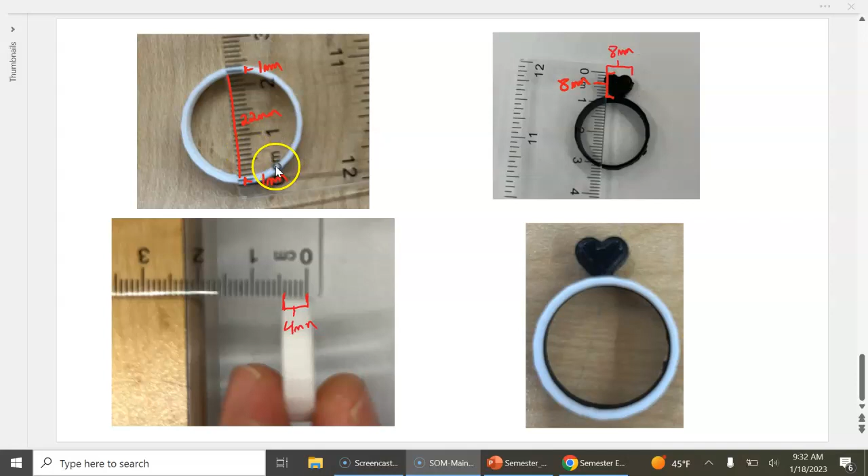So you can see the dimensions here. We have 1 millimeter for the thickness of the ring. The height of the ring is 4 millimeters, and the inside diameter is 22. Once we get to the heart, it's going to be 8 by 8. So let's go ahead and get started.

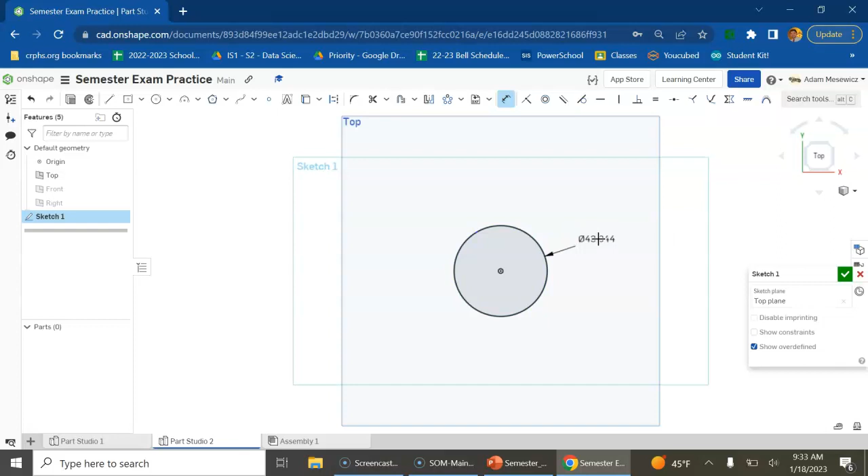This is going to be a single extrude, so we're going to be working on the top plane. We can hide the front and hide the right. We'll create a new sketch on the top plane, and start by making the inside diameter, which was 22 millimeters, so we can dimension that to 22. Then the thickness of the ring itself was 1 millimeter.

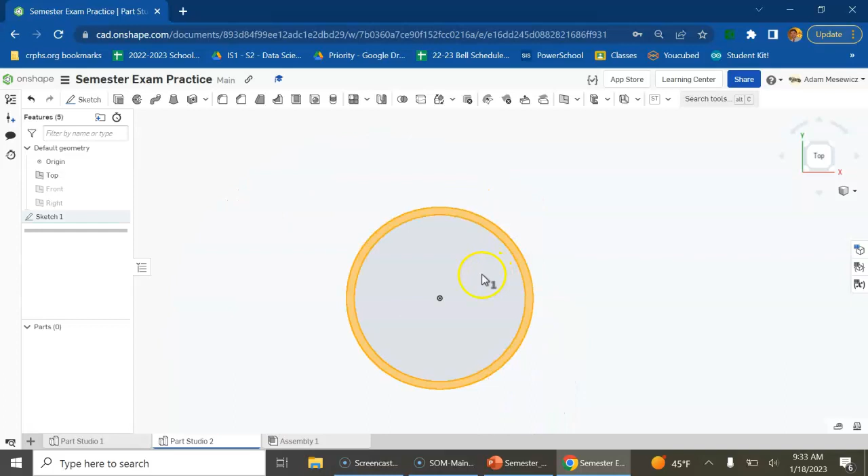So we can change this by doing an offset, change that to 1, and just like that, we have the sketch for our ring. To bring this ring to life, we will extrude it at the height, which was 4 millimeters. And like that, we have the ring.

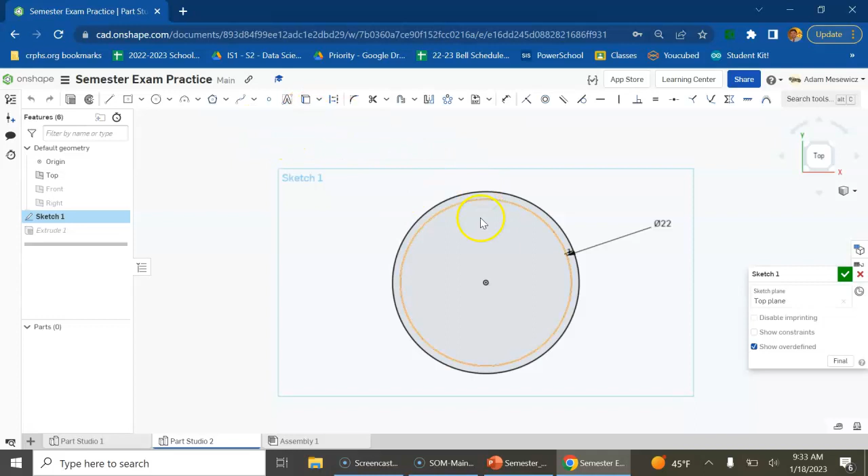Pretty easy. Okay, so let's go ahead and add the heart onto the ring. We'll go back to the original sketch here, and what we need to do is create a symmetric heart, and the heart needs to be 8 by 8.

So what I'm doing right now is adding in a construction line, because I'm going to make this heart symmetric, so I'm going to mirror it over this line. Alright, let's go ahead and create a point.

Now I do want this to be slightly intersecting with my ring itself, so that when I extrude it, it's all one part together. Not too much, but just a little bit. So we'll go ahead and make sure that happens.

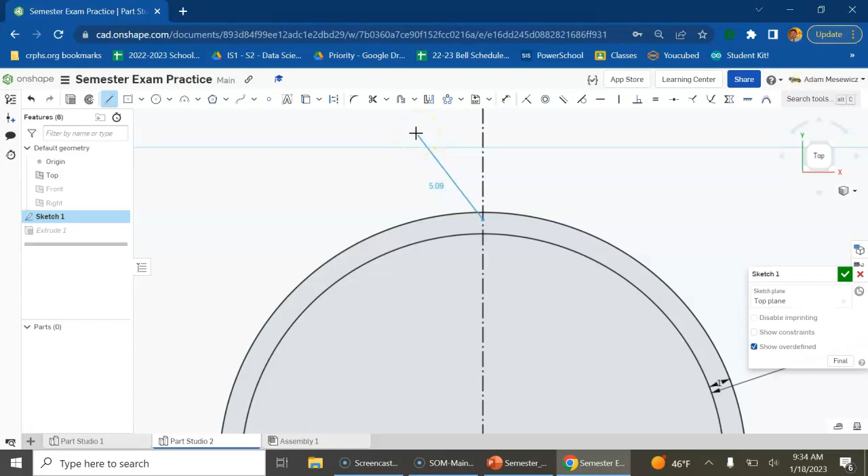Make sure that's just a regular line, not a construction line. And it needs to be 8 millimeters total, so this should be about three-quarters. Maybe we'll make this about 5 millimeters here.

And then to add on the top part, we won't use a circle, but a 3-point arc, starting here, ending about here, and make the radius right about there. Okay, so we have half of the heart.

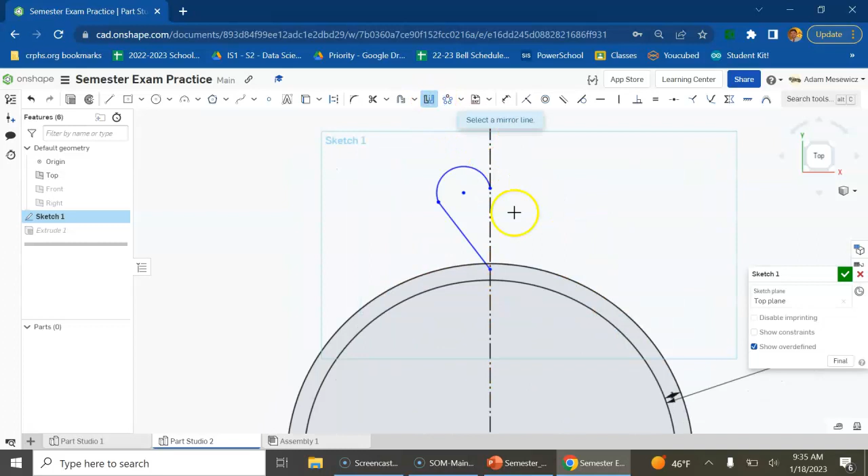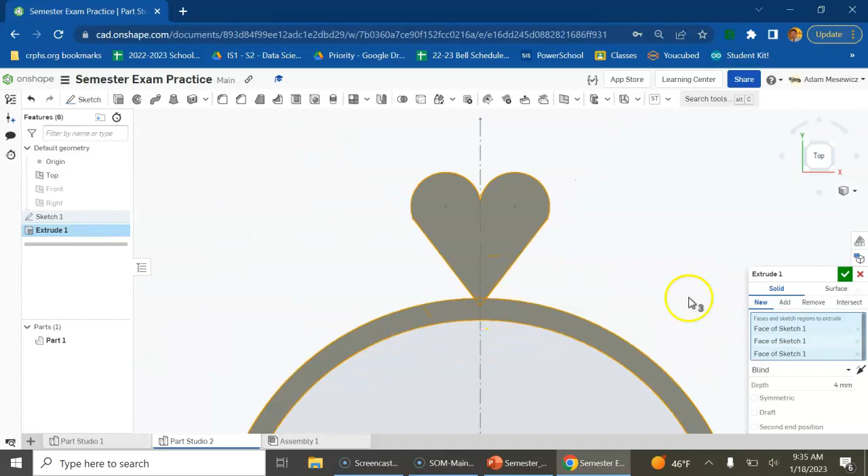Now all we need to do is use the mirror tool. So we select our mirror line, choose our entities to mirror, and after we change it—if you notice, right now all it did was cut out that little part. We need to change the extrude and add this and the part that's intersecting. And there we go.

Alright, so there are your rings, your heart ring and your regular ring. Just a simple sketch and an extrude.